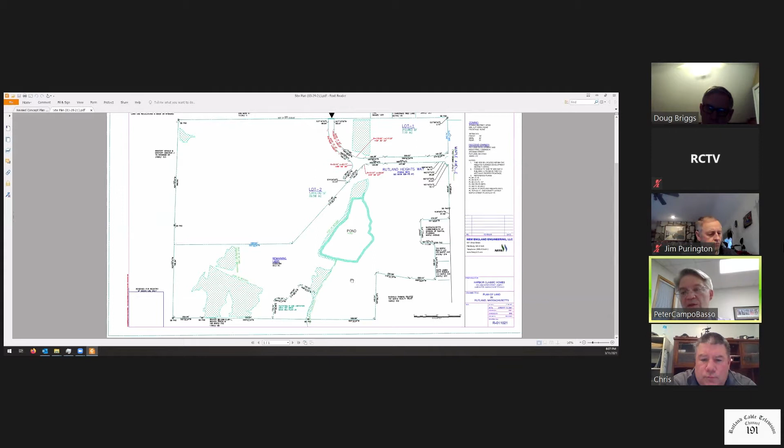We submitted two plans. The first plan shown is the proposed A&R plan, which creates three lots for the parcel off of Maple Ave. The area identified as Lot 1 is Area C on your Rutland Heights reuse plan. The area shown as Lot 2 is Area A on your Heights reuse master plan. The remaining land below would be the Area B land that stays with the town. One of the discussions at our first meeting was creating an A&R plan to establish the lots, so this is the plan we'd want to bring to the town planning board for approval.

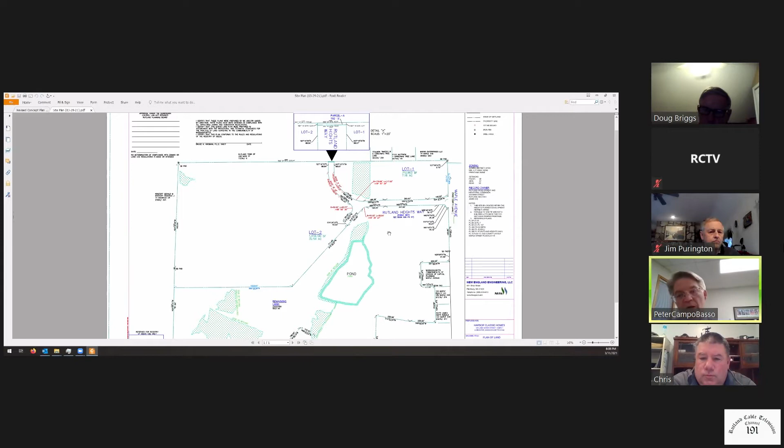Based on that, if you go to the second plan, we can talk about the proposed concept plan. There you go. Thank you.

At the last meeting, we discussed whether or not to include housing units on Lot 1 as shown on the plan. The sentiment and consensus was to move everything off of Lot 1, up into Lot 2, and focus the housing project up there, leaving possible options for Lot 1 open for further discussion.

In the process of moving up the hill to concentrate, our thought was to calculate within the bylaw how much land there was and what the density area regulations would allow. It almost makes sense for us to have an idea of the total number of units that could possibly go there, instead of just focusing on a fixed number, not knowing exactly how the final project will play out once we get some site work and investigative work done that will substantiate and support how many units can go up there.

So our thought, Harbor Classic's thought, was let's let the town know that there's the potential for more than 88 units, so that we don't start drawing final plans and then come in with more units and have it be a surprise to the town.

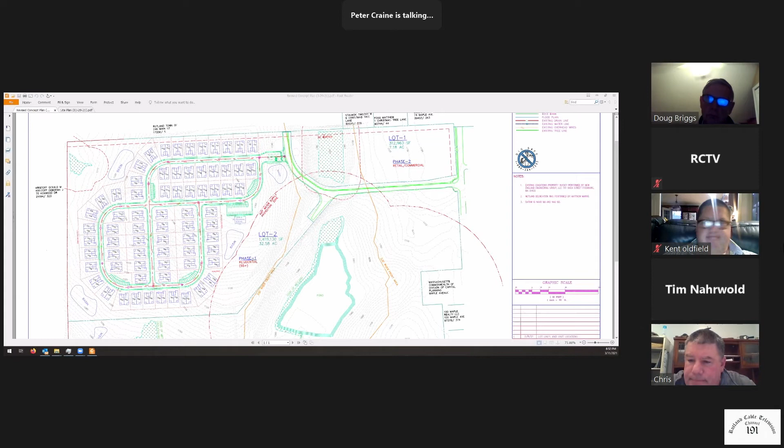Okay, open this up to the public if there's any public members online who would like to comment or ask a question. Please raise your hand, Peter Craine, if you can see any of them, or feel free to let them speak. I don't see any hands raised.

Chris, this is Tim Nahrwold. I apologize, I can't get this hand thing to work. I just wanted to give a quick comment. I understand the comments on density, but being on the planning board and seeing how many subdivisions and ANRs are going in Rutland, the density doesn't really concern me with the way we're building on the side of hills. What does make me excited is the tax revenue, which this town is in desperate need of after this financial season goes by. So the more houses that go in that aren't taking up our services or adding to our school costs, I'm happy to let them build them.

Thanks, Tim. May I step in also? Go ahead, Dick. You know, you're looking at a small piece of paper, but if you went up to the heights and staked out roughly what you've got here for houses, they won't look quite as compact as what it looks like here. I'm just saying that when you get up there at the heights, there's a lot of area.

Thank you, Dick. A question to Kent and Peter CampoBasso: right now, per this plan, what is the distance between a duplex and the side lot lines? I know there's not lots there, but you have the little red dash lines basically clearing out a lot. So what is the distance between the structures, as well as the distance on the front side from the road? We're keeping 20 feet between buildings, and I think it was 25 feet from the front to the edge of pavement. Those red lines are what we call exclusive use areas, which will be deeded for each one of the units. We keep more than 20 feet between buildings because that's the NFPA firefighting regulation for suburban firefighting.

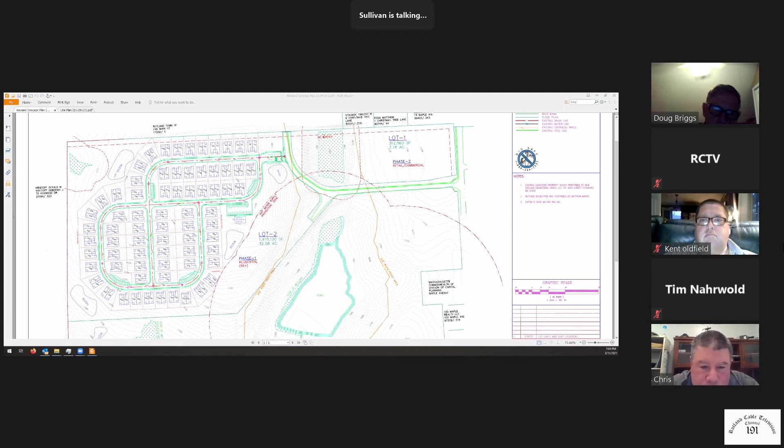Mr. Chairman, just one comment on the double barrel road. Brunel East, that double barrel road, if I remember correctly from 20 years ago, is close to 1,000 feet long, and Moose Meadows is easily that long. So I don't know how long this is, I haven't blown it up big enough, but it's nowhere near that.

Yeah, that's Moose for sure. Meadow does have an emergency exit right near 68. Also, so no matter if it's a double barrel, it still has a gravel emergency exit.

All right, so at this point, if there's no other comments from any of the town members or public comments, I would like to discuss. And Mr. Craine, Peter Craine, if you see anybody looking to speak, please, I only see about 4 or 5 people on my screen, so by all means, please just interrupt me and we'll let them speak. But at this time, there's nobody else.

I'd like to discuss with the review board how they feel about allowing this as a loose concept plan, and start digging into the details of a formal site plan.

Chris, can I just add something quickly? Sure, Michelle, please. I just had this thought because we were talking earlier about keeping the trail access around the perimeter of the property. And we had talked with Solar about using that trail access as potential emergency access as well, if the trail is wide enough to fit. But I don't know that a fire truck would fit down there, that's my only concern.

Yeah, I think when we talked about that, it would be just for like a 4-wheeler to go up, and if someone was walking and had a heart attack or something, you'd be able to get up there, but you wouldn't be able to get the actual trucks up there. So it would be a smaller vehicle that we were talking about with the Solar.

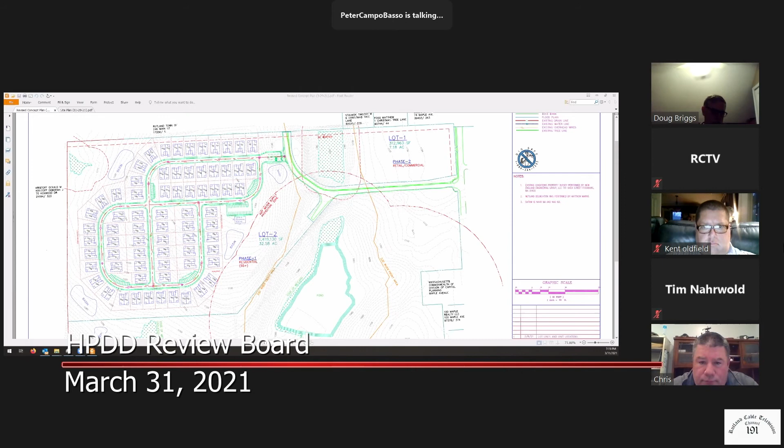No, I think that in line with what we discussed at the prior meeting, it probably makes sense that any type of concept plan you would approve tonight would be strictly for lot 2. The idea was there's no way we'd have enough time between the last meeting and now to figure out what could possibly be proposed on lot 1 to incorporate retail or commercial use. So instead of holding the process up, the request was we'll move everything to the top.

The concept plan we're proposing would approve the residential senior housing project as phase 1, leaving lot 1, phase 2 open for down the road. Once we have a better handle on what we could possibly propose there, we'd come back with a revised concept plan showing a building on lot 1 for retail or commercial use. But we wouldn't want to hold up approval on lot 2, because we want to get going on the engineering and design and move toward a formal site plan.

Okay, thank you. That's a great explanation. Yeah, that gives us some clarity for where you're coming from.

Chris, the only question I've got, and I want to shoot this out to everybody: can we approve the concept hearing and end up closing that hearing? But how do we start another concept hearing when he comes back for phase 2? Do we leave it open to continue? Your thoughts legally, guys like Doug and Dick and Michelle - you've got more of that legal sense of how to keep a meeting open and closed. Where do we go with this?

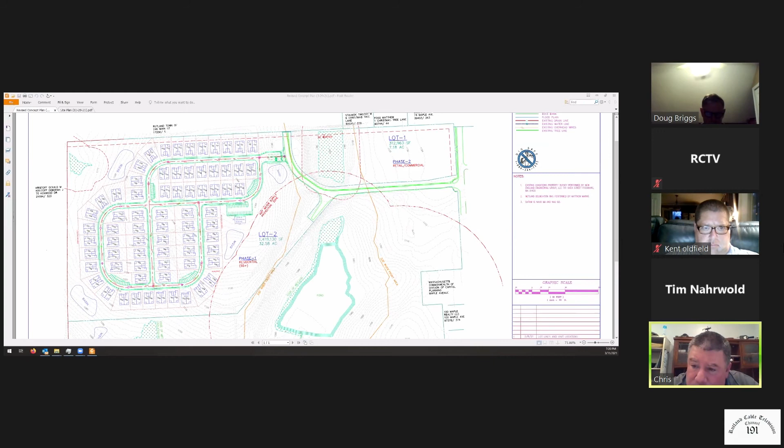Peter, does it make sense just to treat these as 2 separate concepts and 2 separate site plans? From your timing, from you and your team, is that the way it would go anyways? That is definitely the way it would end up playing out, yes. Chris, so from a legal point of view, is that something we can do?

Does anybody know? Chris, I was just going to say, if we close out the public hearing tonight, and then HCH comes back at another time to present a concept plan for lot 1, we would essentially just start the process over again. They would have to notify abutters, we'd have to publish a legal notice, and it would just be treated separately because it could no longer be discussed if we close the hearing.

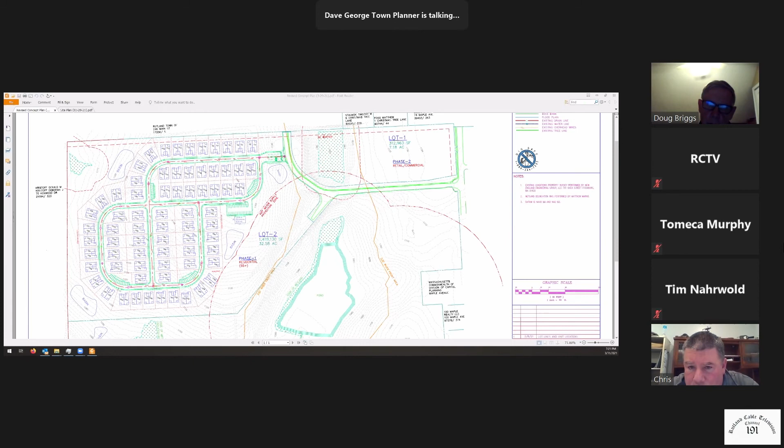Okay, yes, if I could also jump in on this — I have 2 meetings going, but I'm not available for the other one yet. I was just going to indicate the same thing: if these can be segmented out, if you close the entire hearing on this one and only take action with respect to lot 2, make it clear that no action is being taken on lot 1, except that it's conditioned for retail commercial. Then it's just 2 separate projects at that point. When they are ready to come back, they would just have to go through the process again.

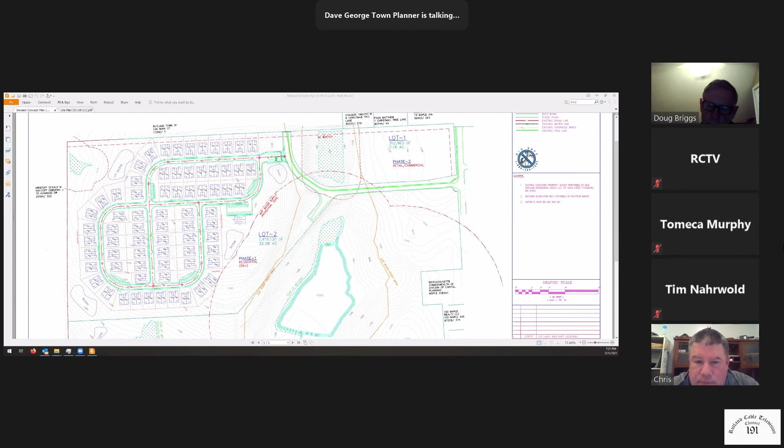Okay, so we'll just treat these as 2 separate lots that they are. This is just for lot 2, not phase 1 — we're going to get rid of the phasing terminology here. I know that's on your plans, and that's fine, but we won't use that terminology then. I got you, all right. And that's all legal to do — that's not a problem, right? It's not a problem because it's consensual. It's very clear what's happening, and if you are very specific that this pertains to lot 2, not lot 1, then I think that's clear.

Yeah, just a quick comment — I don't think we have anything to do with lot 1. Lot 1, retail commercial, has got nothing to do with Harbor Homes. Harbor Homes is what we're talking about, on lot number 2. My problem is, the number of years I've been involved in Rutland, we always seem to have plans that we promise — and I have nothing to do with you, Peter — we're going to fix something, whether it's Bear Hill, we're going to do this, we're going to do that, and then we end up fighting at the end to get things we never get. I agree with Jim that we have some extremely viable concerns about the ability for access roads and whatever.

I would think that if we kept this hearing open for a week or 2 weeks, and we put the effort in to talk to DCR and whatever, so we can actually say yes, we can put a road in, or no, we can't — if we can't put a road in, then their whole plan has changed anyway. So if we close it out and allow them to go, I've seen cases where they say, well, we reconfigured things based on this, and now you're putting extra stress on us because we're going to have to redo something. So my motion, or whatever, was to leave this open for 1 or 2 weeks so we can get a more definitive idea of whether DCR will allow us to do something with the accessibility to the lower lots of the property. And if it doesn't happen, then we got to come back here, and there's a whole bunch of changing that needs to be done.

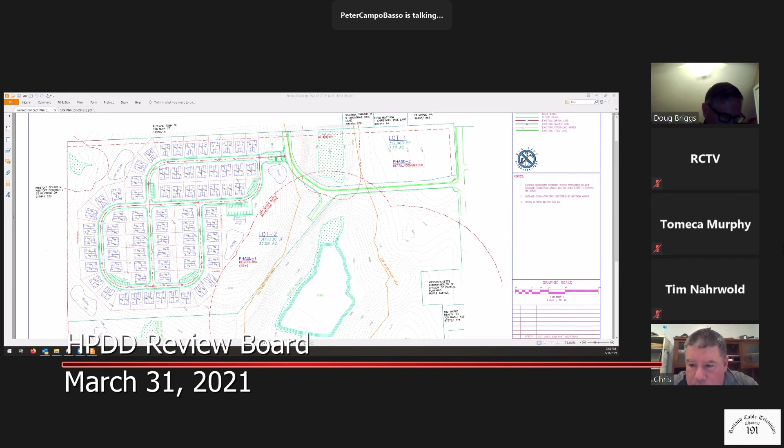If my hunch is correct, I don't think we're going to start doing work and come back to the board and have you vote against or turn down the plan. So there are things we're capable of starting now so we don't lose a lot of ground. If one of the members is able to speak to somebody, there's also people we can try to contact at DCR to get a sense of what would need to happen, so within a couple of weeks we can have a meeting. That seems to be the big issue the board wants an answer on. So let's try to get the answer, and we're going to keep moving anyway. We're not going to let this set us back.

And Peter, what's your time frame from transitioning to a concept plan approval to providing your first set of site plan documents? What kind of time frame are you looking at overall, roughly? Nothing to hold you to, just to get a sense.

Well, I imagine Kent could probably speak to that. From our perspective, we're going to need to start doing some site work, in the sense that there's a need to go up there and dig some test pits to verify locations, see what if anything exists underground. So that's all going to start being scheduled now. This can proceed without approval on the concept, right? Correct, that can be done at any time. You can do that right now.

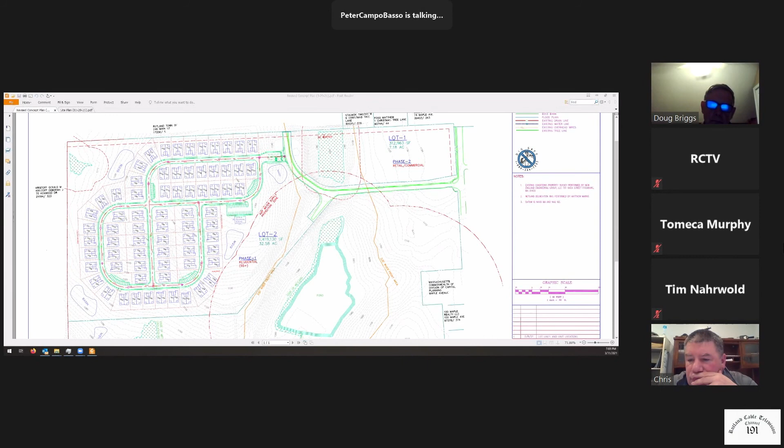I'm not sure if I missed it, but is it just that there are other meetings scheduled pushing this out to the 21st? Yeah, Peter, I have zoning board hearings the next two Wednesdays. Okay, that ties me up those two Wednesdays. I'll ask the board if there are any other nights you guys are available. I have such a busy schedule right now at night, I'm afraid to pick any other day than Wednesdays, because between zoning board and training and licensing work, that's all I've got. Well, brutal.

I've got the 27th, I've got something on the 6th next week. Is the 15th available for the board? That'd be 2 weeks and a day from now. I'd have to check Zoom, Chris, just to make sure something wasn't already scheduled on one of the accounts, because we can only have one meeting per Zoom account. We only have 2 right now because the 3rd is being kept blank for FinCom. There are already 2 meetings scheduled for that night, CIPC and the Earthworks Board. Oh, thank you, Peter. Yeah, this Zoom doesn't make it easier.

You just can't meet in the hall somewhere. Do you want a motion to reconvene this hearing on the 21st? Yes, we would need a motion to continue to the 21st at 6 p.m. I'll make that motion. I'll second it. Okay, thank you, Michele. Is there any discussion regarding that?

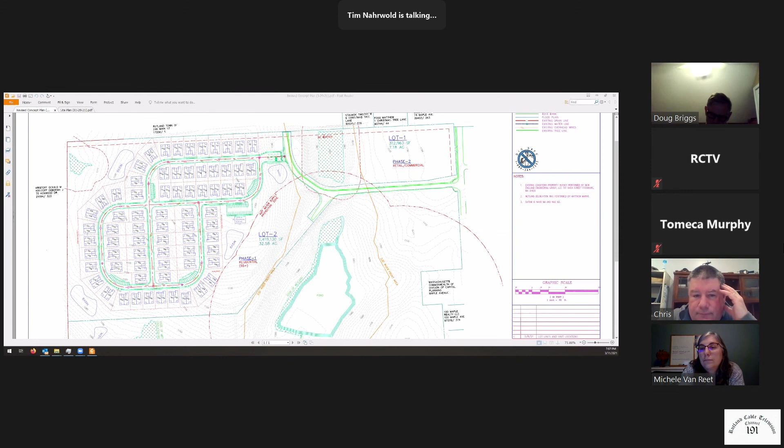Thank you very much. Any other new business, old business, anything to discuss? Chris, this is Tim. I just wanted to also throw it out - I know Dick's going to beat me senseless at the next planning board meeting, but it wouldn't be a bad idea to show this plan to Joe with this double barrel and see what he thinks. Does it need to be another 100 feet? Does it need to be 200 feet longer for emergency access and his DPW guys? I just thought I'd throw that out there.

We'll do it. I tried to hand it to him and he turned it away and he says, I haven't got time to look at it. But I will bring it back to him. Okay, I'd like to get his buy-in, Dick, before it gets to the design stage. Yeah.

Hey Chris, I got a basic question. So let's just assume for the moment that the state won't allow improvements to that road. Does that mean that in you folks' opinion, the plan as presented is dead?

Well, I'm just asking because, to me, I think it was Doug who raised the issue. You got to go in front of the planning board. Well, that's just a straight up ANR approval that's basically a rubber stamp. If it meets the 1,000 feet dead end street criteria, then the roadways are okay. Now it's a matter of whether you as a board are comfortable with the density only, and that's a whole separate discussion.

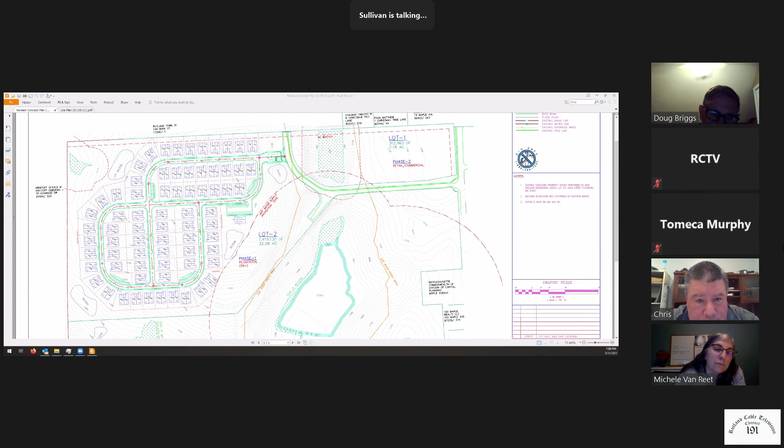Well Mike, I think there's a couple ways to skin this cat. I don't think the plan is dead. In all fairness to everybody on this board and the applicant, there are a lot of issues with this site that this review board probably shouldn't have to be dealing with. This is no disrespect to the RDIC board or the planning board or Dave George or anything, but this is such a unique process, and there's a lot of unique situations up here. We talked about the solar, we've gone through so many different things that were really outside the review board's process. So I've tried to keep a very flexible and fluid mind to this, just to keep things moving along, because every time we hit a roadblock, I don't want to just kick this back to your board and say, go deal with every little thing here.

But I think there's a way you can put another road through this site outside the 400-foot buffer, because right now he has no roads or property on the 400-foot buffer. Just picture another road, with the road coming out the very southern side of his project, entering that southern part. Maybe there's just another road outside the 400-foot buffer we have to create, and I think it can be done. Yeah, it'll blow his plan up, but I still think he'll have close to the quantity of units he even shows on this plan. And that would provide access to that lower section. So I think there are multiple ways to look at this.

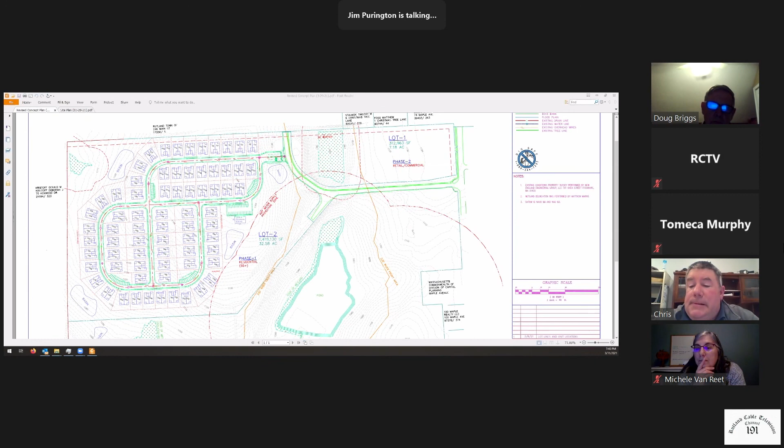A question: does the RDIC think it's important to have permanent access to the south part of the property, lot 3? Good question. Dick said we needed it to maintain that lower level where the AUL is. Is that correct? That's correct. Right, and the dam. Yeah, no, I agree. That's right, and the dam on the stream there.

But you could get to the dam on the other side, right? If you need a roadway, you need a roadway on that side too, yeah. That's true.

Let me ask this: if the site stayed just the way it is now, that existing roadway that was graded, why is that not good enough access for the town to get to the AUL and also the dam? It could be. It very well could be. Again, that's not for us to answer. I would really go back to Joe's DPW on that.

As long as this HPDD review board doesn't really feel we need two paved accesses to this, Mike, if this board can get over that, or is okay with this plan -- not saying exact quantity, but just that one main access to Rutland Heights Road -- then I think a maintained gravel road, even with a gate where the water line can go up through, would be acceptable. I think that's a possibility. I do. It's not all up to us, though. As chairman of this board, I'd want feedback from other departments before saying there's no problem with that. And obviously it's among all 5 members here, not just me, but that's my opinion.